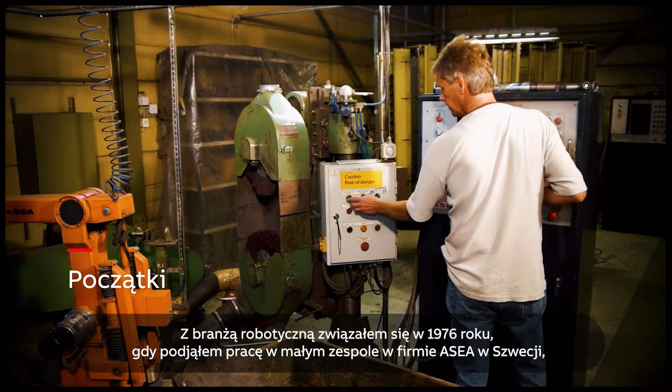I started out in the robot industry in 1976 when I joined the small team at ASEA in Sweden, now ABB, that developed the world's first all-electric microprocessor controlled robot, the IRB6. Although we had no PCs, no internet, and no mobile phones, we were able to create a robot that was not all that unlike the ones we make today.

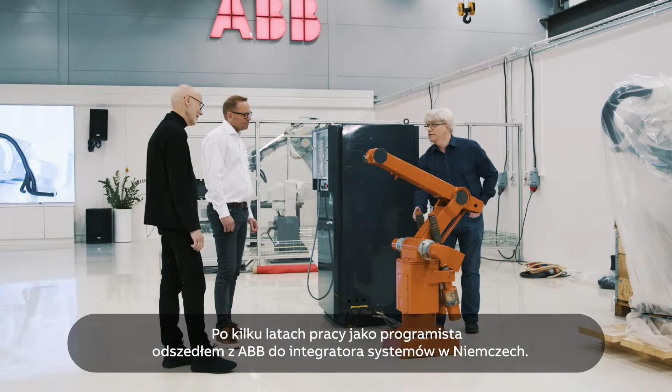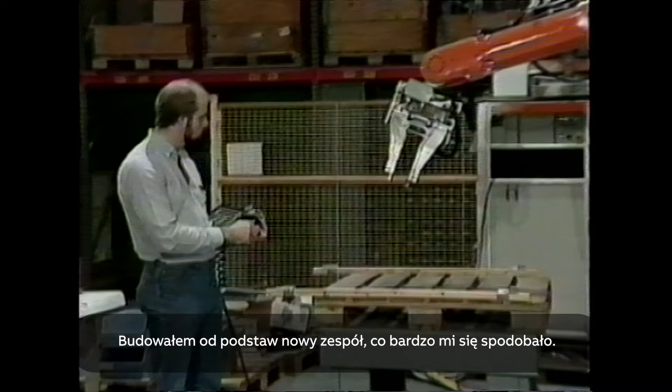After a few years as a developer, I left ABB to work with system integrators and end users in Germany, where I got a customer perspective on robotics. In 1985, I was recruited back to ABB to start an R&D department in Milwaukee, USA. There I had a chance to build a new team from scratch, something I really enjoyed and have been fortunate to be able to do several times again.

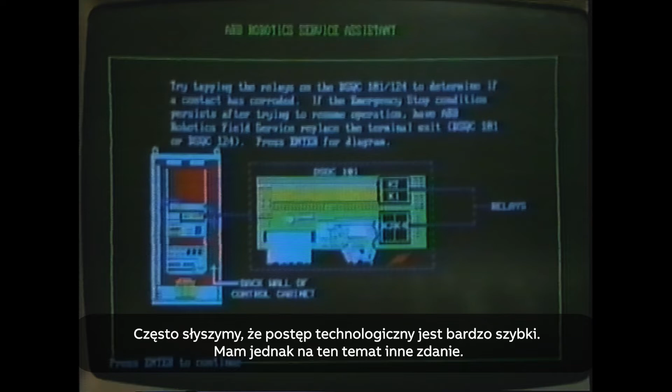We often hear that technology advances extremely fast, but I beg to differ. The things we were working on in the 1980s that we today would call IoT, digital twin, and AI are yet still just on the verge to become pervasive.

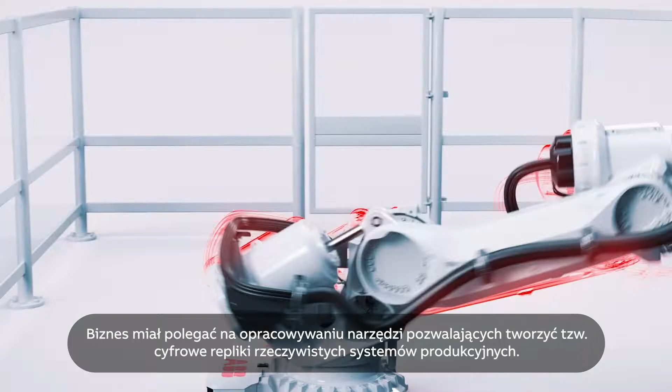After more than a decade in the US, I moved back to my native Sweden to start a new company named Digital Plant Technologies. The business idea was to develop tools to create what we then called digital replicas of real manufacturing systems. But we were too early. It was too difficult to build digital twins of all the equipment in a factory. Often we didn't even have 3D models.

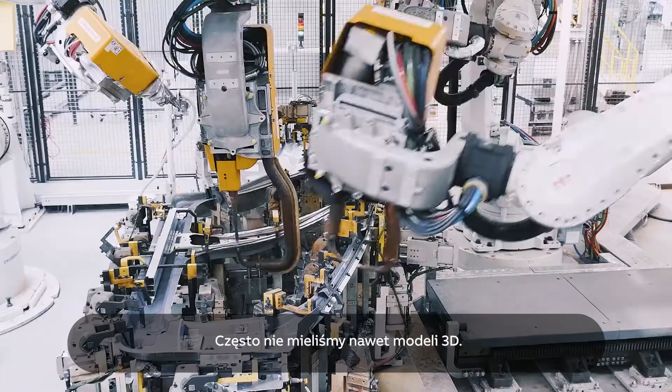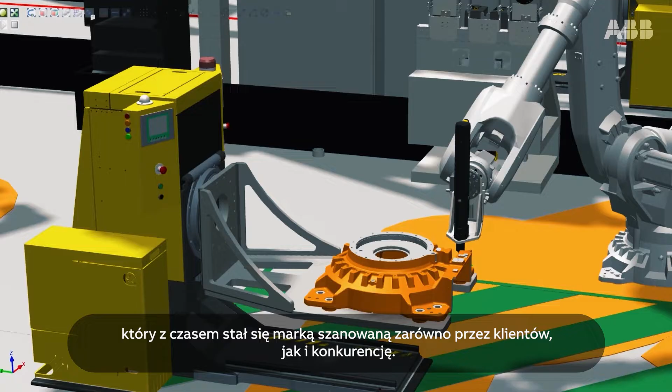So the company was acquired by ABB, and the scope was limited to ABB robot systems. We already had digital twins of these as a result of the work done in Milwaukee. We named the product RobotStudio, a trademark that has since earned respect among customers as well as competitors.

The secret to success of RobotStudio is that it runs the same software that is running on the real robot controller. So what you see in RobotStudio is exactly what you get in the factory. That makes it possible to do virtual commissioning, designing, testing, and verifying a new manufacturing system in the virtual world so that the startup in the plant goes fast and you can quickly ramp up production to full capacity.

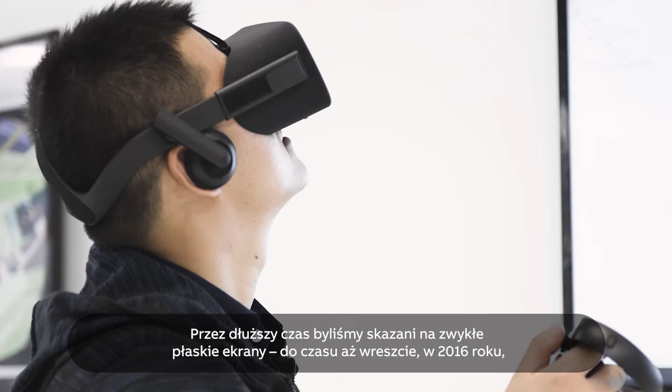Already when we first started to develop RobotStudio, we intended it to run in virtual reality. The technology was available, but was too expensive to be commercially viable. So RobotStudio was confined to flat displays for a long time until it could finally be released in 2016 when inexpensive consumer devices became available.

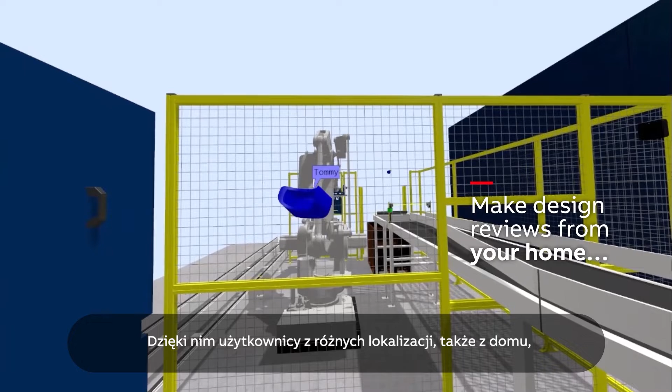In RobotStudio we were early adopters of VR. A particularly useful feature has been VR meetings. That has made it possible for users in several locations, including from home, to meet as avatars inside RobotStudio to collaborate on robot solutions.

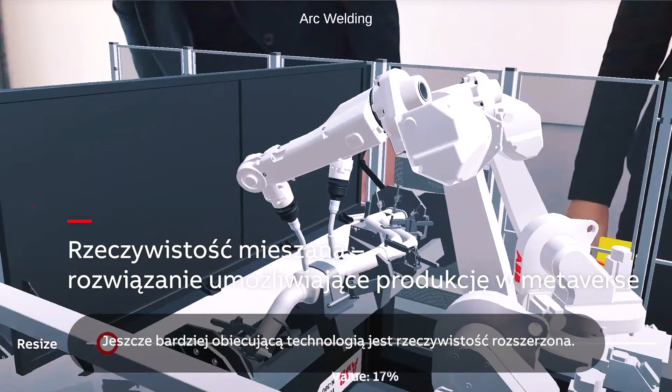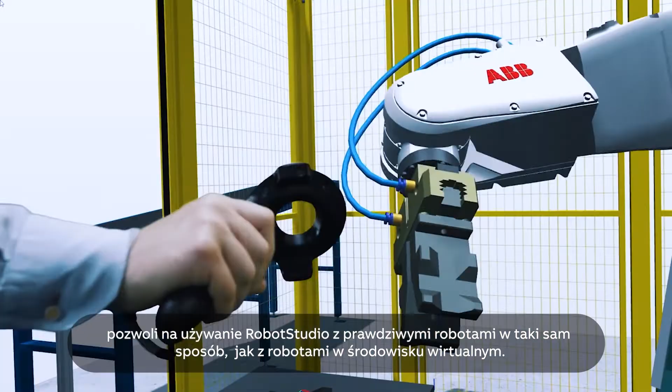An even more promising technology is augmented reality. Being able to visualize robot paths, work objects, and safety zones in the factory will make it possible to use RobotStudio with real robots in the same way that it is used with virtual robots. And devices such as teach pendants that today are physical can be replaced with virtual ones. Just to mention a few of all the new possibilities that the metaverse will enable.

I am proud of what we have accomplished this far, and I am really looking forward to the journey ahead.